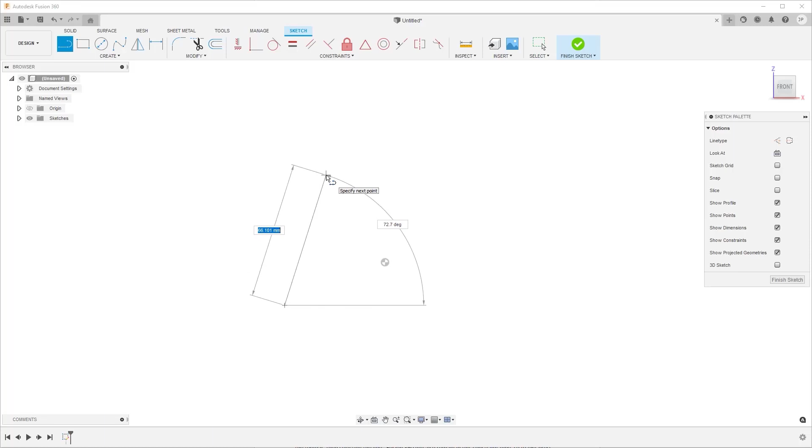For instance, with this line you can currently drag the endpoints and the line itself in any direction you wish, which is good when exploring form, although now you want to start locking things in place to limit its movement and refine your design. To lock this sketch in place, you may first want to apply a vertical and midpoint constraint so that it can only move in a vertical direction and is centered around a common point that can also be used for subsequent sketches and components.

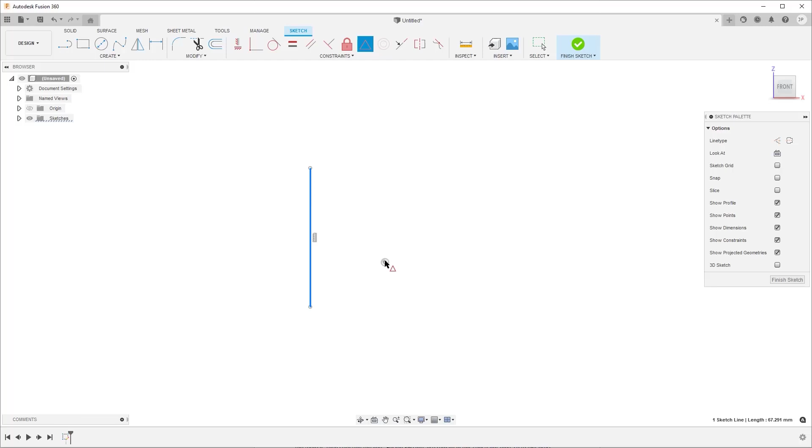Now if we try and drag the endpoints, you can see they are limited to movement in the vertical direction and their respective distances remain equal from the origin. Likewise, we cannot drag this line as it is constrained to the origin point. You can now see how constraints can help control your design by limiting its movement with respect to other sketch geometry or the origin.

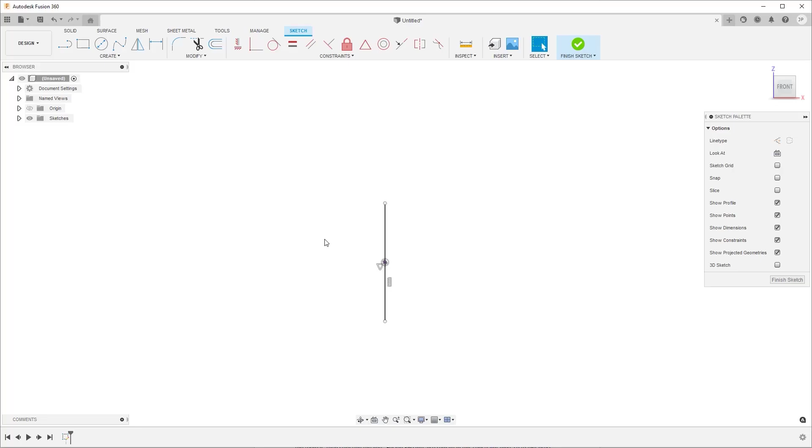As a best practice, you should attempt to constrain your sketch so that it aligns with the origin. By doing so, all other sketches and components you create will have a common reference point, helping to build more unified, consistent, and manageable designs.

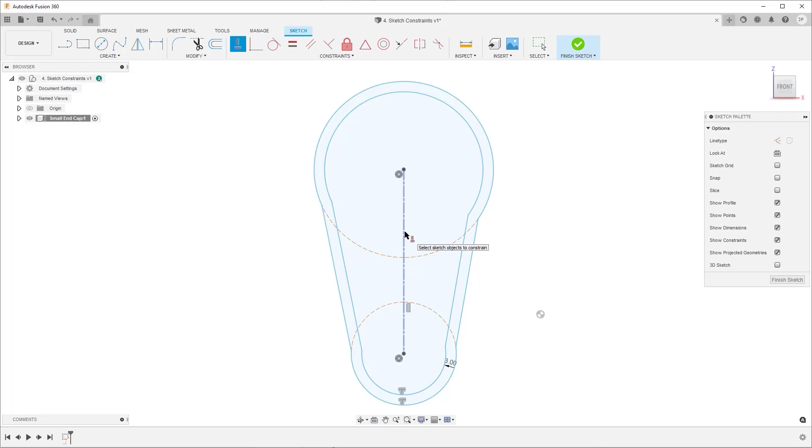In this case, you should first constrain this construction geometry as it is a central feature which the other sketch entities are based around. At first glance, this geometry already appears to be vertical, although if we apply a vertical constraint by selecting it from the toolbar, then the line itself, we can see a slight shift and a vertical constraint symbol which indicates this was not the case. This is a note that although geometry may appear to be constrained, it is best to apply the constraints to confirm. Fusion 360 will then remain in this constraint type, so to exit, press Escape on your keyboard.

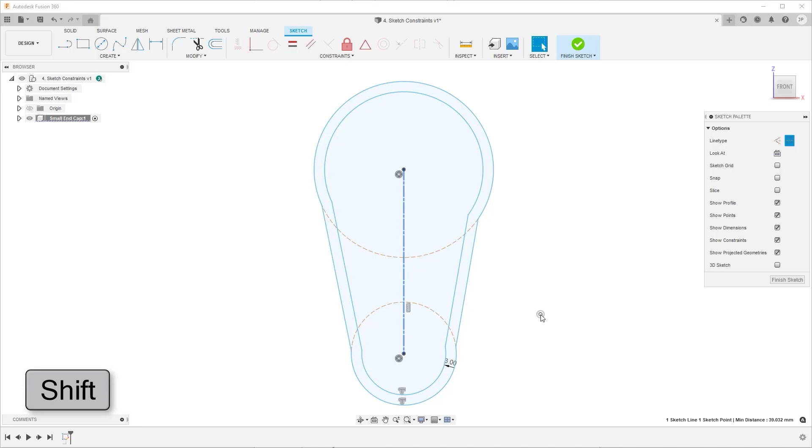You can also pre-select geometry by left-clicking to select the first, and whilst holding Shift on your keyboard, select the other feature. Those that have been selected will be displayed in the bottom right-hand side of the Fusion 360 canvas. With this pre-selected geometry, click the midpoint constraint from the toolbar. This will place the construction line's midpoint to sit exactly on the origin point, and again, with the respective constraint icon now present. With the base reference feature constrained, you can now begin to constrain other sketch geometry.

One other tip is that if you pre-select geometry, then right-click to open the marking menu, Fusion 360 will only display respective constraints that can be placed. For instance, here I will select this arc and the line by again holding Shift, then right-click to bring up the marking menu. You can see the only applicable constraint options for these selected geometry types, so go ahead and click on Tangent.

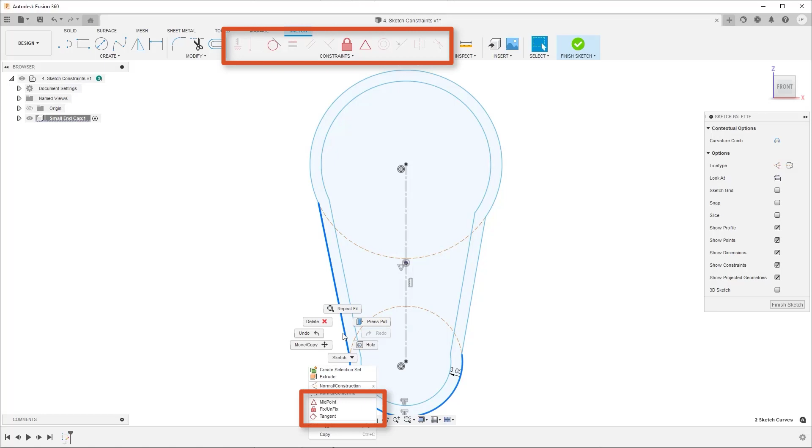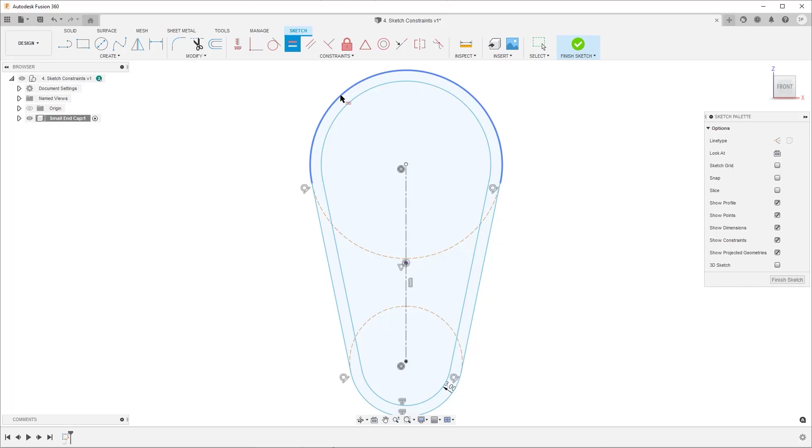Finally, by adding an equal constraint to certain features, you only need to apply dimension to one, and if the value is changed, these will automatically propagate to all equal instances. One note here is that if you ever find your sketch becoming too busy with the placed constraint symbols, then you can always hide these from the sketch palette. Now you have your base constraints placed, you can now look to add dimensions to fully constrain and define your design.

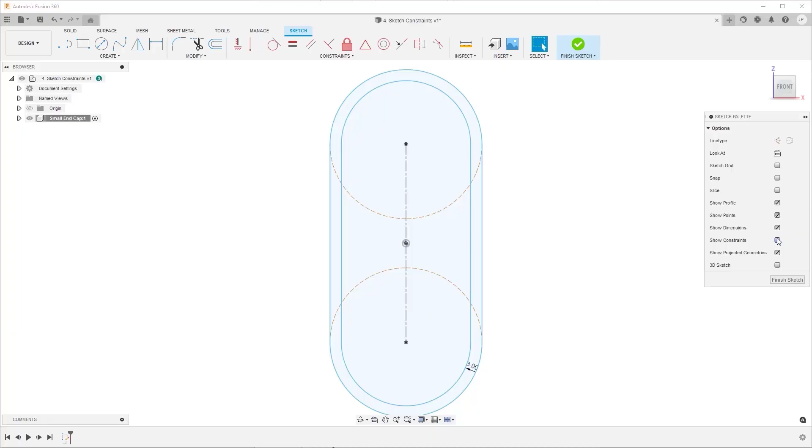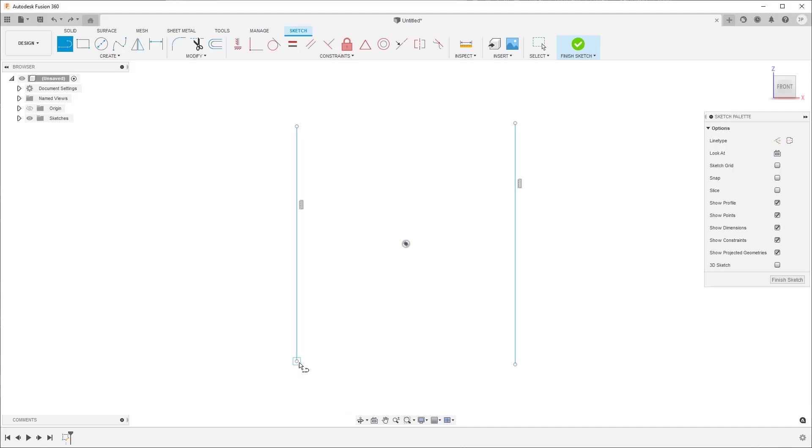Fusion 360 also has the capabilities to place automatic constraints to help speed up your workflow. In this example, if you draw a new line that is connected to the end of this existing line and drag away, you can see this blue perpendicular symbol where the two sketch entities meet. What you are seeing is just a preview of the automatic constraint, as you are currently still free to move this particular feature in space. It is only when you click to place the geometry with the preview visible that the constraint will be placed, as confirmed by the respective constraint symbol.

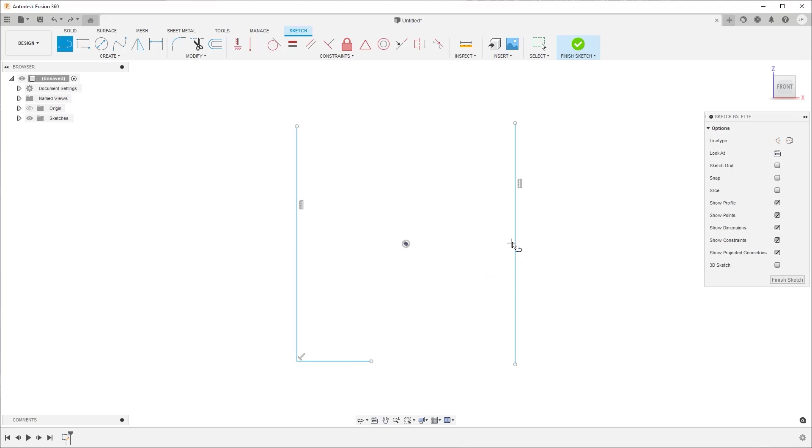Now if you attempt to drag the endpoint, this is locked or constrained to that respective constraint. You can do this for any number of constraints in your design, for example with this midpoint and subsequent perpendicular constraint. And as a quick tip, you can also temporarily disable this by holding Ctrl, or Command on a Mac, then continuing with your design. This feature helps you speed up your workflow by creating these constraints without any additional subsequent steps.

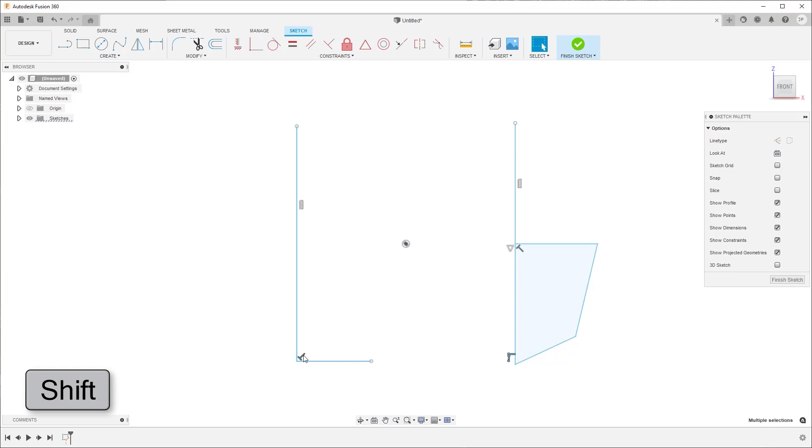Finally, if you ever find you've made a mistake or wish to remove a constraint, you can always select the respective constraint icon, or select multiple by holding Shift on your keyboard, and press Delete on your keyboard, or right-click and select Delete.

Now you know how to apply constraints to a sketch to lock down key features in a parametric design in Fusion 360. Thanks for watching.